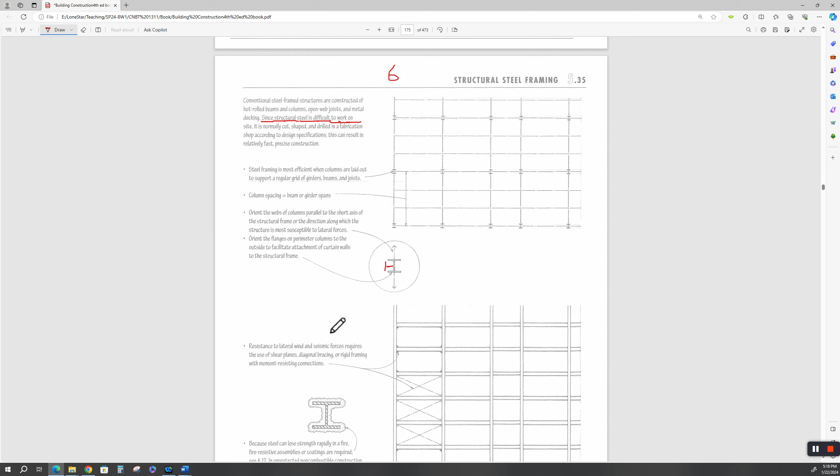Resistance to lateral forces -- we talked about this before. Making a rigid structure, well, they're welded joints. Is it rigid? Are we going to cross brace it? If you cross brace it, you can't really put a window in there now, can you? How are you going to skin this? Where are your shear walls going to be?

The structural engineer has to go through and do a moment distribution. When a wind or earthquake is pushing on this building and wants to make it fall down, where are all these moments going to go through these columns and how are they transmitted all the way down to the foundation? That's the structural engineer's job.

The big thing you got to worry about is if I want to expose this steel because I want it to look pretty, like in the Centre de Pompidou in Paris, France, how are we going to fireproof this? Because fire code says you need to fireproof your building, and that's a good thing, because steel will lose its temper after a certain temperature. Some say 800 degrees it begins, some say 1,000, some say 1,200.

If you go back and look at the videos of 9/11, those planes crashed into the upper section of both World Trade Centers. They disintegrated in there and started a huge fuel fire, that jet engine fuel. It heated that structural steel up so hot, above it and below it, into the heat affected zone, that the steel just couldn't take anymore, and those bundled tubes let go, and the building collapsed all the way down through the center line.

Now, this is a curtain wall. We haven't talked about curtain walls yet. You've got to put some kind of skin on it to keep the wind, temperature, and rain off of it. So most of these buildings have some kind of curtain wall. Some have windows in them, some don't. How do you frame that curtain wall? How does it tie into the diaphragm floors? How does it tie into the structural steel? That's what all this is about.

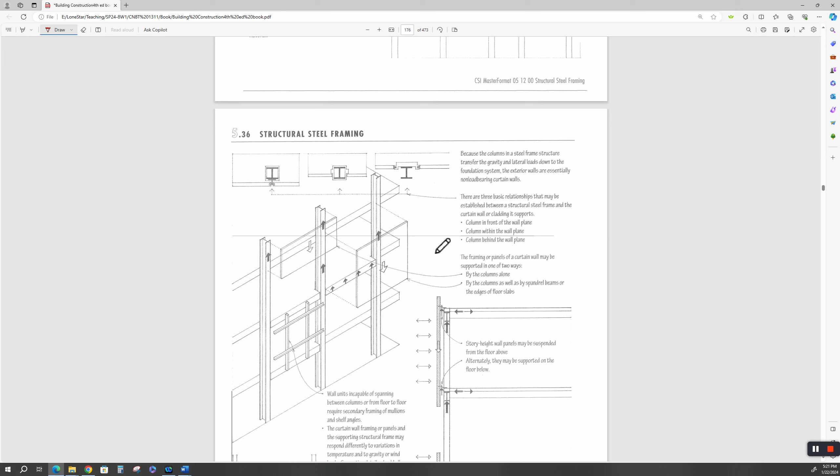There are three basic relationships that may be established between a structural steel frame and the curtain wall or cladding it supports: column in front, column within the wall plane, and column behind the wall plane. Here's a column in front.

Column behind the wall plane. We have an offset, and you've got clips that hold this. You got it in front, within, and then behind.

But they all have to be fireproofed. Some of the fireproofing can be sprayed on. Sometimes they box these columns in multiple layers of sheetrock to get you your 1, 2, or 3 hour fire rating.

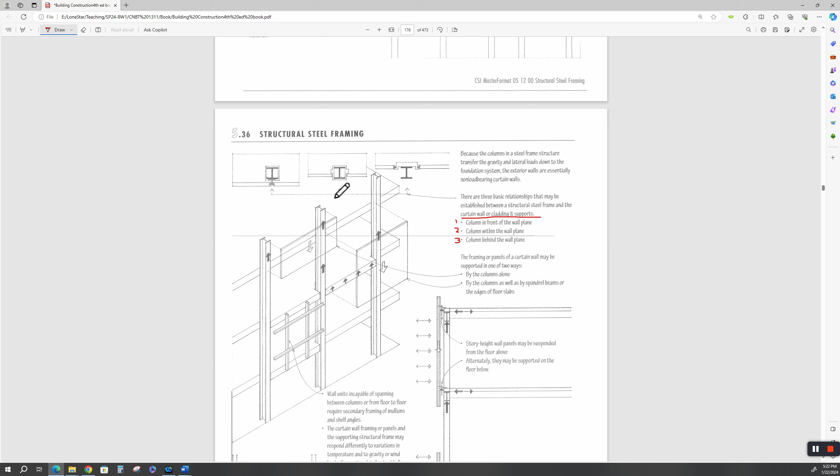Wall units incapable of spanning between columns floor to floor require secondary framing or mullions and shelf angles. So sometimes you have to have mullions or secondary framing to hold your curtain wall. That all has to be architecturally designed. Again, you get with your curtain wall people.

The curtain wall framing or panels and the supporting structure frame may respond differently to variations in temperature, and that's a very true statement. If this is a lot of glass, it's going to have a different thermal expansion rate than the concrete and steel will. That has to be taken into account.

Sometimes you've got to float that curtain wall, let it move on the outside of the skin. That skin's going to move back and forth. The wall may be subject to both wind pressure and suction - we've talked about that before, how on one side it's positive pressure and on the other side it's negative pressure.

You may have to have spandrel units. Jack bracing is like a knee brace. They all go by different names by different people who make this stuff.

If diagonals are used to brace a structural frame, they will affect the design of the wall units. You might want to show your diagonal bracing, your X bracing, if this was glass, but you might not - this might be a solid wall panel. Then on the next bay that didn't have X bracing, you could put glass in there.

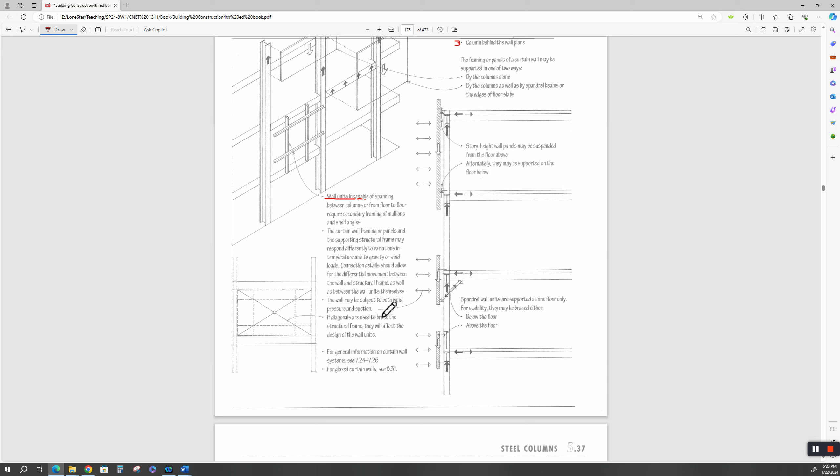This is not easy. This is not an easy profession. Construction's not easy, structural engineering's not easy, architectural design's not easy. It's fun, it's challenging, and it's rewarding, but it takes creativity.

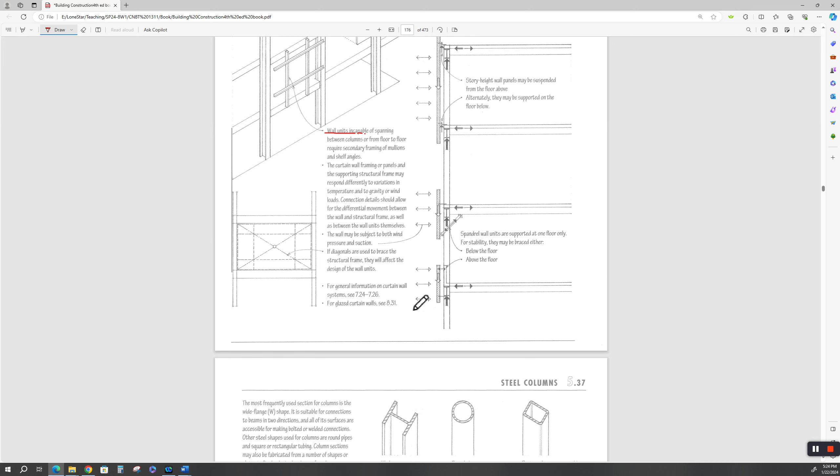In Chapter 7 they talk more about curtain walls. This is just a sprinkling. You could specialize in curtain wall systems, just like you could in structural steel or concrete or masonry. For glazed curtain walls, see 8.31 - that's where the individual panels are glazed or inset in a steel frame.

Most shapes, we've talked about these before. We had a larger collection of structural steel shapes in the floor section. Anyway, it's a W shape, round pipe, rectangular, square tubing, welded plates for girders. We talked about girders in the Hardy Toll Road. Welded plates are box girders.

I've never seen a cruciform or four angles welded together like that. I have never, ever in my life seen anybody use something like that.

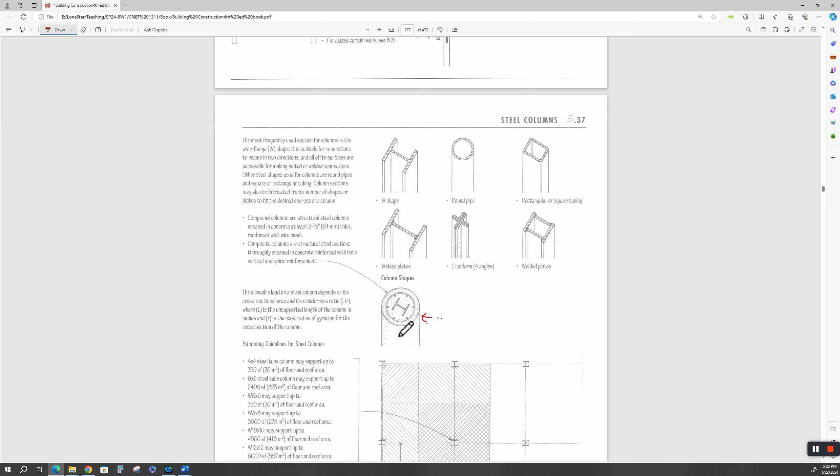Now, I have used this quite a bit, where we would use a structural steel hot rolled member inside a large round formed concrete column, and you'd have your normal concrete reinforcing steel to support the concrete, and this would be one big super duper super strong concrete column. It's a composite column because we're using structural steel and regular concrete reinforcing, so they call that a composite column.

Compound columns are structural steel columns encased in concrete, at least 2.5 inches thick. Why they make the distinction between compound and composite, they're the same - it's all the same. Sometimes you'll take a round pipe, if it's big enough steel pipe, and you'll put reinforced concrete in here. So you're doing a composite column backwards.

The allowable load on a steel column depends on its cross-sectional area and its slenderness ratio. That means its length to its radius of gyration, where L is the unsupported length of the column in inches, and R is the least radius of gyration for the cross-section of the column.

We talked about this before. You've got this long spindly column, but if I come in here and rigidly attach something in the middle of that column, then this column's not going to be this long. It's going to think it's this length, and there's going to be another column that thinks it's that length, not the full length. That's a layman's Reader's Digest version of KL over R. K is a stiffness, length, and then radius of gyration.

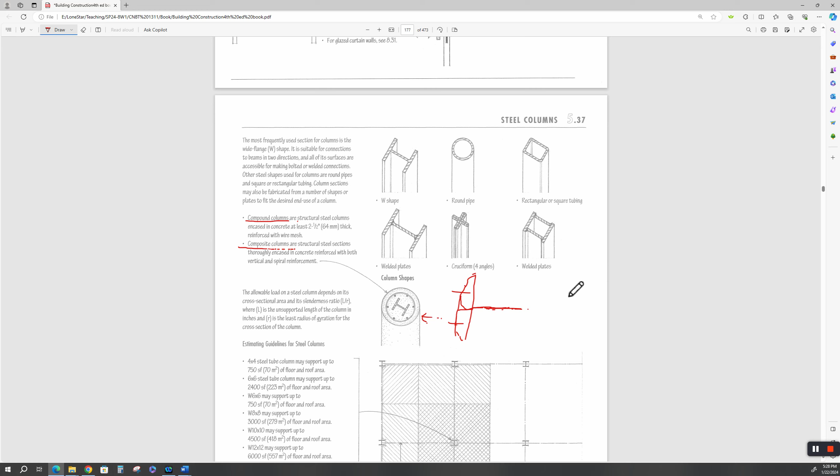I welded up some big plate girders. I don't remember if I told y'all that in a previous video or not, for the Hardy Toll Road, going over the railroad yard. Those beams are bent up and look like some crazy person did them. The reason we did them like that is because the railroad would not give us clearance to sink a column. So I had to go way outside the normal specs and design a big welded box girder. Those things had real super thick flanges, 8 feet deep. Anyway, I think I've already stated that.

Estimating guidelines for steel columns. Oh my God, this is going to get you in trouble.

These are rules of thumb you will get with your structural engineer. You will consult with your structural engineer for final design, somebody that actually knows what they're doing, and they need to be a PE, a professional engineer, registered in the state you're doing your business in. You're going to want company in court if this thing falls down and goes boom.

But this gives you some rules of thumb for your general layout. A 4x4 steel tube column may support up to 750 square feet. This is okay, but again, it depends on your floor load.

It depends on everything, okay? But a 6x6 steel tube column may, and I love this, see, may support. Doesn't say it will, it says it may. This says may support. There's no guarantee. It says it may support.

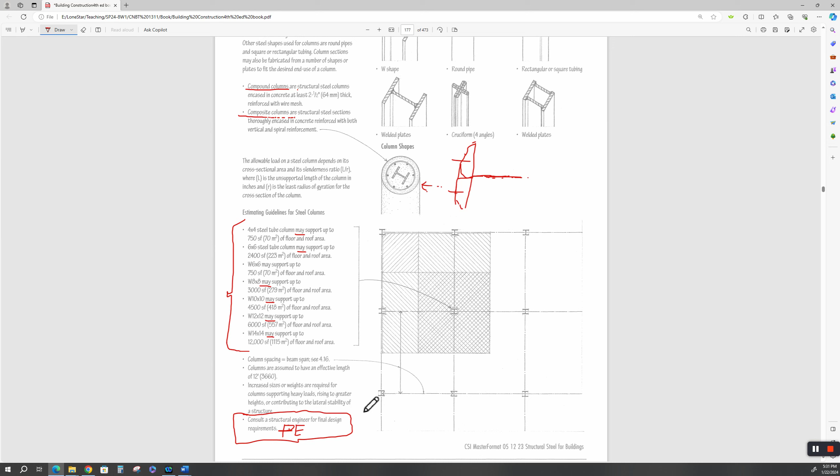Increased sizes or weights are required for columns supporting heavy loads. Well, no kidding, the heavier the load, the stronger the column has to be. And then you got to worry about your lateral stability, and we've talked about all of that. We just did that up here in this KL over R thing.

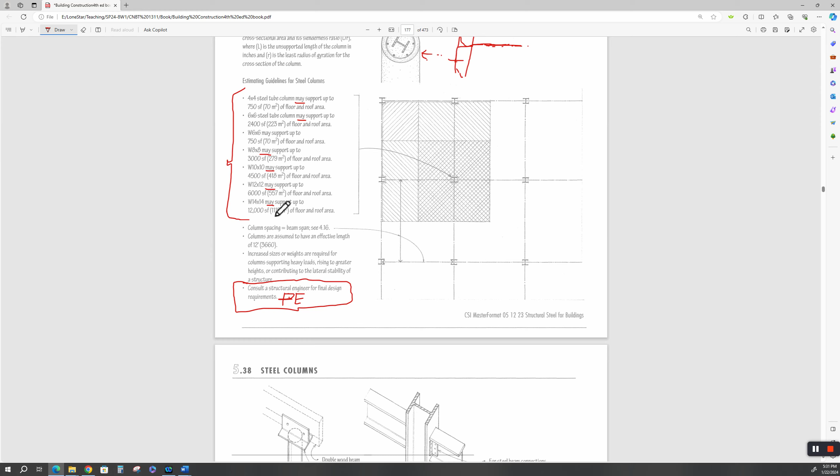Again, what are you going to do as the architectural designer? You're going to consult with your structural engineer. You can use this to start with on your butter paper in your dreamscape, but don't be surprised if your mileage varies. Remember the term may as opposed to shall.

All right, steel columns. All right, this is important. You will take a steel detailing class. Double wood beam or a steel connector welded to a column.

You're going to have a steel connector welded to a pipe or a column, and then you can slide your beam over your wood beam, and there'll be holes prefabricated in here by your fabricator for your wood joist. Steel beam connections, AISC, we talked about those before.

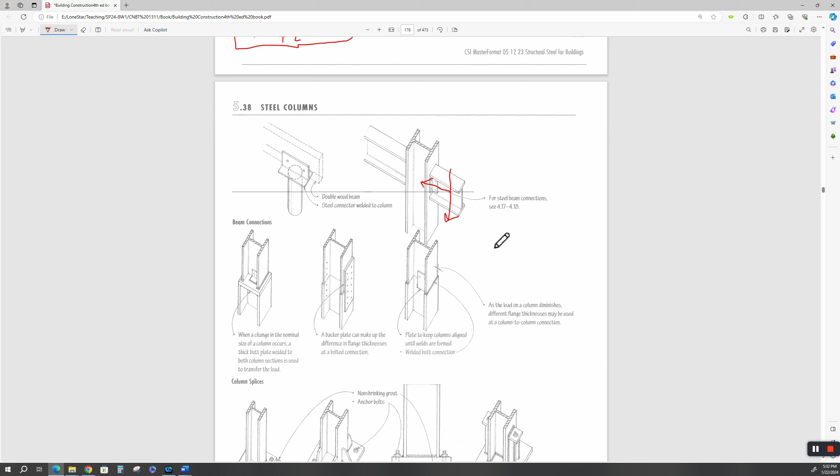This is considered a pin connection. It will not transmit moment. It will resist lateral movement this way, and it will resist shear movement, downward loading that way. Okay, go back to chapter 4 for steel beam and column connections. I already talked about that.

Column splices. Okay, now why would we even talk about column splices? Because the higher up the building goes, the less weight the upper columns take, right?

Are you going to take a huge beam on the bottom and run it all the way to the top? If it's a mid-rise building, it'd be more economical to use the same size column all the way up—that makes your building stiffer. But if it's a high-rise building, you'll step these columns because the upper floors carry less load than the heavy columns down lower. So you'd have to splice them.

So this is a way to splice them. When a change in the nominal size of a column occurs, a thick butt plate welded to both column sections is used to transfer the load. So you have this butt plate.

Welded to this heavy column, then you set the lighter column on top of it with an alignment clip, and that clip is welded. The bolting is to align this, so you can shim it and plumb it. Then your structural welder will weld all the way around this thing, all the way around the side. I'm surprised they didn't weld that—maybe they don't need to.

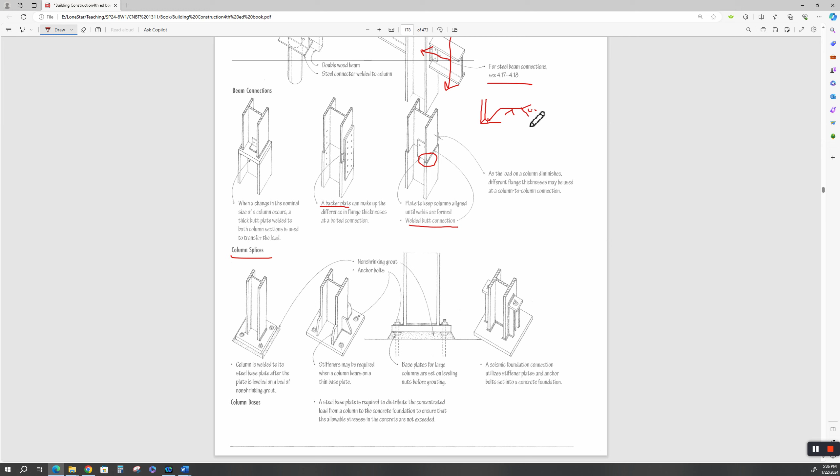Your designation will be your rod, like an E6011 or E7018—that'll be part of your welding deal. If you want it welded all the way around, you put that symbol on there.

As the load on a column diminishes, different flange thicknesses may be used—we already talked about that. This is an alignment plate, here's your bolts, so this is an erection plate. It comes from the fabricator already welded on this deal. You line this up, plumb it, shim it, and once you get a go on it being aligned, then you can come in here and weld this.

It depends on how heavy that steel is—you may have to preheat it, or anneal it. You may have to put heaters on it, wrap it, and heat treat that weld after it's welded up, depending on how much weld you had to do.

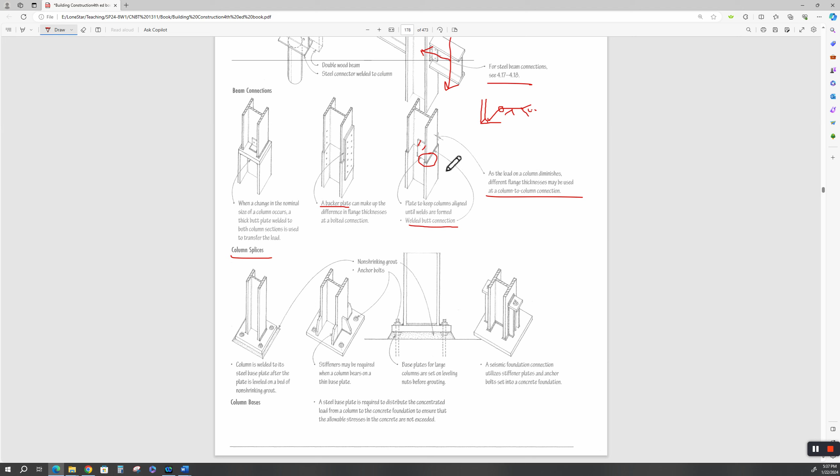Pressure vessels out in large refineries have to do that—put a tent around that big pressure vessel, and wrap that weld joint all the way around it with induction heaters, to heat that metal up, anneal it, and let it come back down to ambient temperature. It's all part of the welding specification you have to follow.

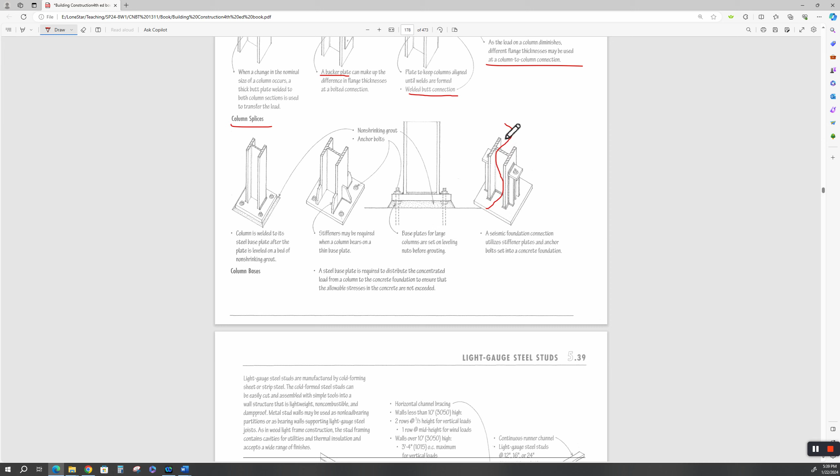A seismic foundation connection—this is a typical seismic foundation. It stiffens that up, and remember the seismic stuff we talked about? It allows that frequency, because this is going to do something like the snake dance, remember? And it stiffens that column up.

Now we're on light gauge steel studs. This is no different than the light gauge steel studs that we talked about in the flooring systems.

I told you about that company—I think they're a New Zealand company. They have a CAD system tied to an extruder, and they prefab these things. They prefab the whole bloody walls and truck them out.

I've got a friend of mine in Montgomery County I told you about—there's not a wood stud in his house, not a wood rafter. It's all steel framing, all light gauge steel framing. And the gauges range from light gauge to more heavy gauge. So this doesn't have to be the super light stuff you see on interior walls in a commercial building. These things can be load bearing, depending on the gauge they're cold-formed out of.

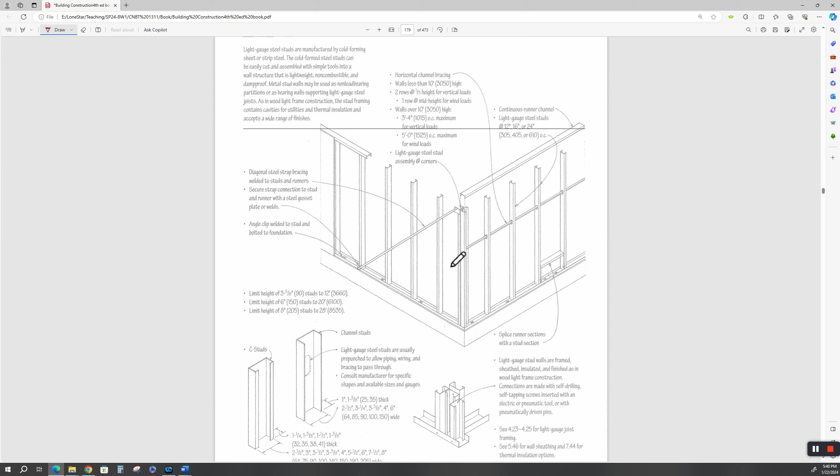We talked about that in that section of the book. And then these things are sheathed just like wood framing.

You've got horizontal channel bracing, you've got diagonal bracing. These things can be welded—you can bring a light MIG welder out on the job site and flux core it.

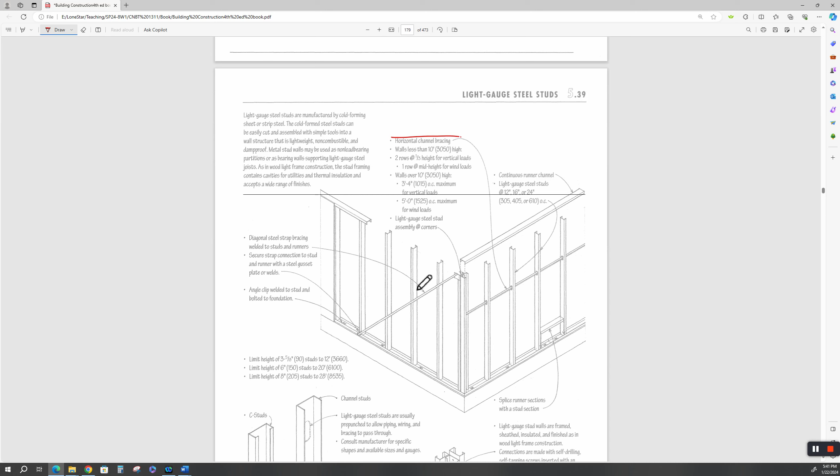You've got channel studs, you've got C studs. These channel studs are lighter—the light gauge ones are used for interior walls in commercial buildings. The C studs will carry a little more weight. They're stronger; they've got a larger sectional density, sectional modulus.

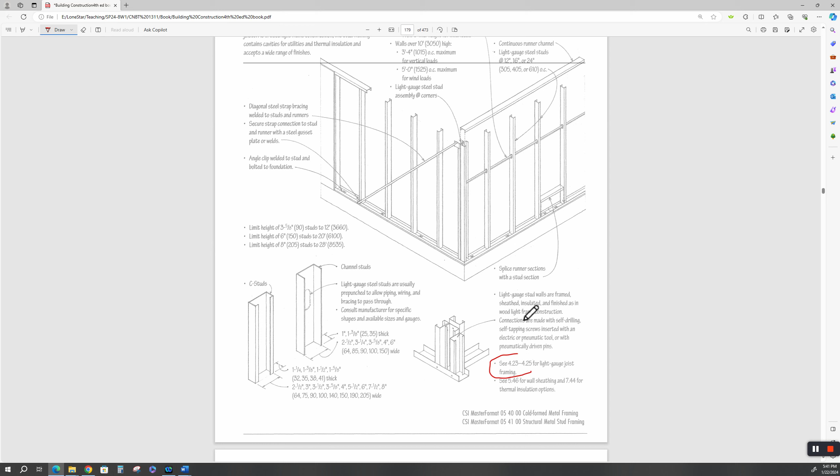You fix this just like you do with framing. We've seen these details in chapter 4. They've got web stiffeners on the end. We've seen this floor detail, and then bringing up a secondary wall. Sometimes you can get by with balloon framing, where if it's a second-story building, this whole exterior wall will be one height.

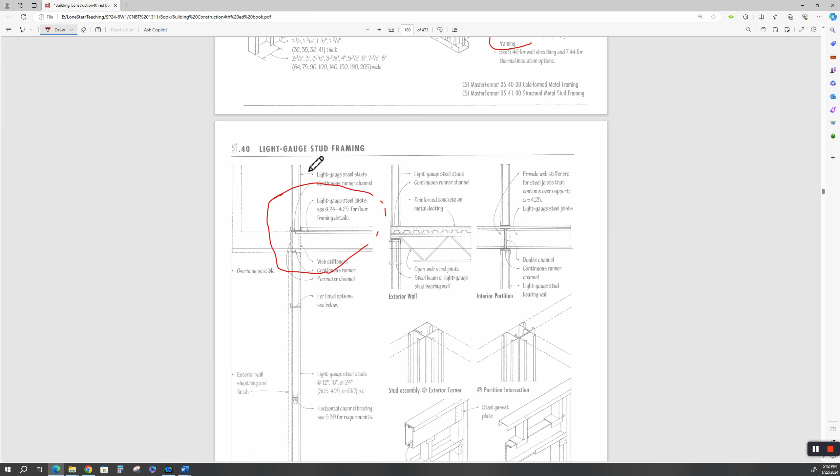This is how you do your interior cripple corners for bringing in your framing. Your manufacturer should have recommendations in their manual. U.S. Steel was a big manufacturer of these cold-formed steel studs back in my day.

Like I said, with some companies this stuff's formed on site. The steel comes out in rolls—4-inch, 6-inch, 8-inch, and 12-inch—and they just put a different die in the extruder. If you need a 12-inch deep C-section that's 20 feet long, they can make it. You don't have to splice it, you don't have to do nothing. That company builds whole walls in the factory, then trucks them and erects all of it, so you're not erecting individual sticks on site.

It's easy to do truss bracing, and with modern spray foam insulation, once you get the exterior sheathing and vapor barrier on there, you can come inside and spray expansive foam in these cavities after all the electrical and plumbing's run, if it's dried in. There's really nothing else to say—the sheathing is whatever wall treatment you want, how much insulation, and the wall sheathing.

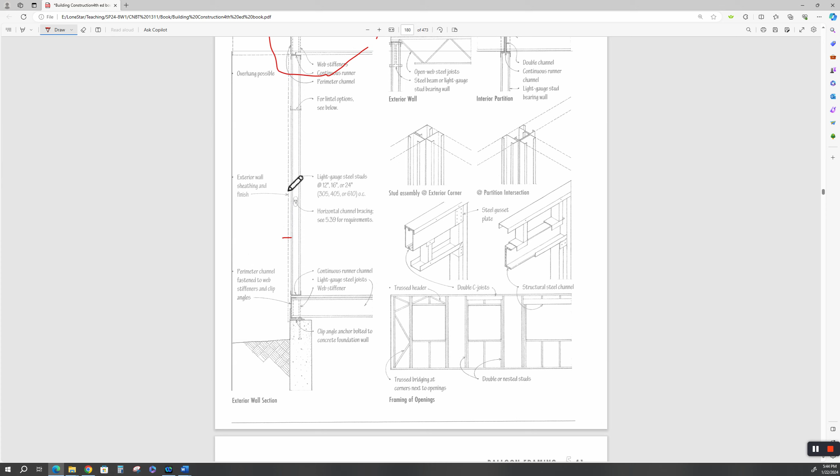If you want an air gap on the outside, you come in and put vertical stringers, then offset your sheathing against your insulation so you have external airflow in super hot climates out through the top. That's another way of doing it. That architect in Austin does a lot of weird stuff like that, where it's like a skin over a skin. Your imagination is your guide.

It talks about balloon framing, which we talked about before. With light gauge steel studs, this is easy to do—you just extrude out the length. I would look at holding this to 2 stories; 3 stories might be a stretch, but for a 2-story residence it should be easily done, especially if you incorporate diaphragm flooring in here. It should not be a problem.

2x4 studs spaced at 16 or 24 inches. I would keep them at 16 inches just because it'll keep the drumming effect out of the walls. Your building codes are going to have something to say about that anyway.

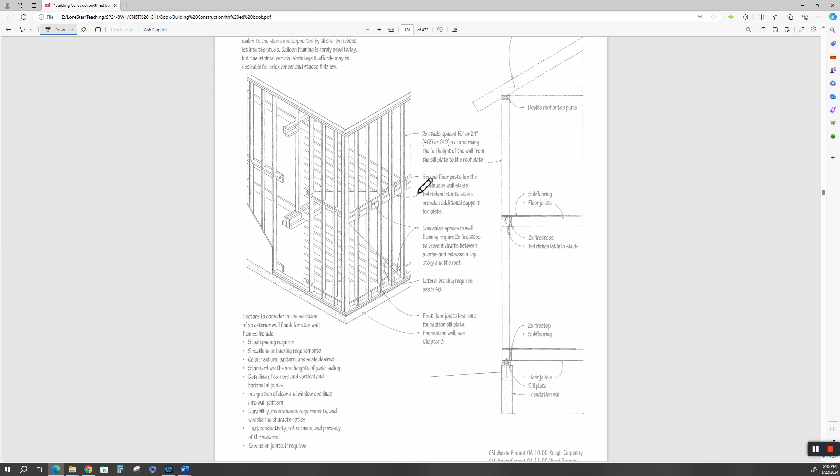Factors to consider in the selection of an exterior wall finish for stud wall frames include your stud spacing, sheathing or backing requirements, color, texture, and scale desired. These are factors you need to take care of as a designer. Expansion joints if required, heat conductivity, durability, maintenance, integration for door and window openings, detailing of corners, standard widths, etc.

We've seen these details before. We talked about fire stops and fire blocking. You may need fire blocking in here too. Again, your fire code and local building code are going to tell you what you have to go by.

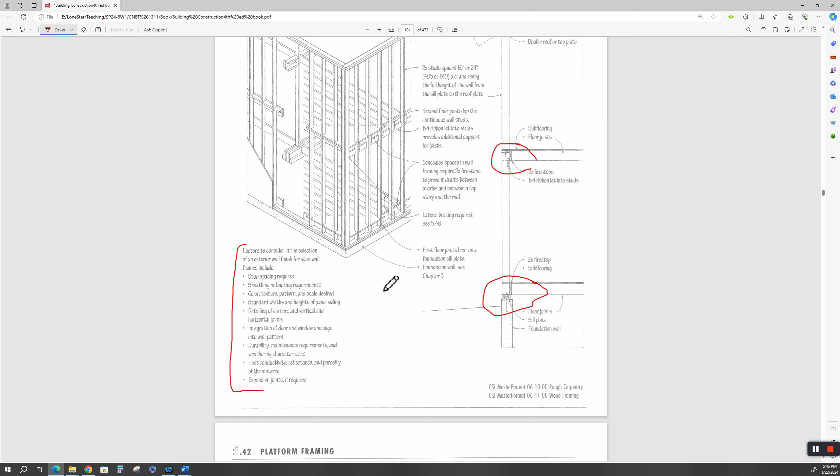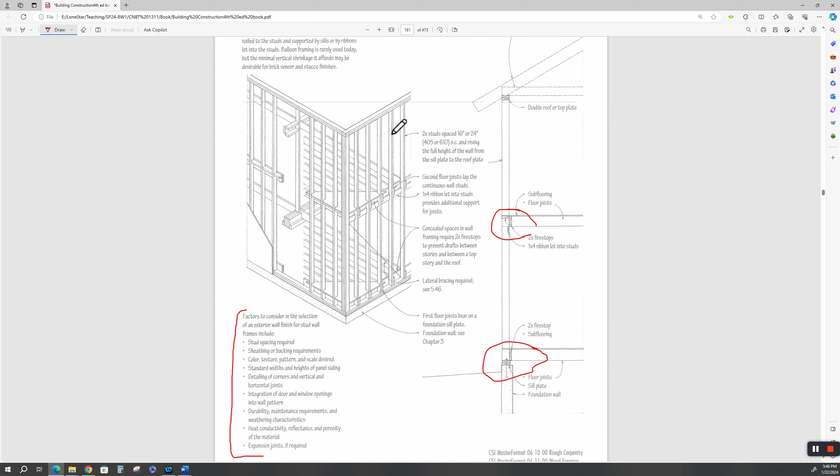Platform framing is a light wood frame having studs only one story high. This was balloon framing, right? We're done with the steel, so it doesn't matter if it's 2x4s or light gauge steel. Balloon framing, you're bringing a whole wall frame up. Platform framing is just that - you got one story, and then you set the second story on top and go on up.

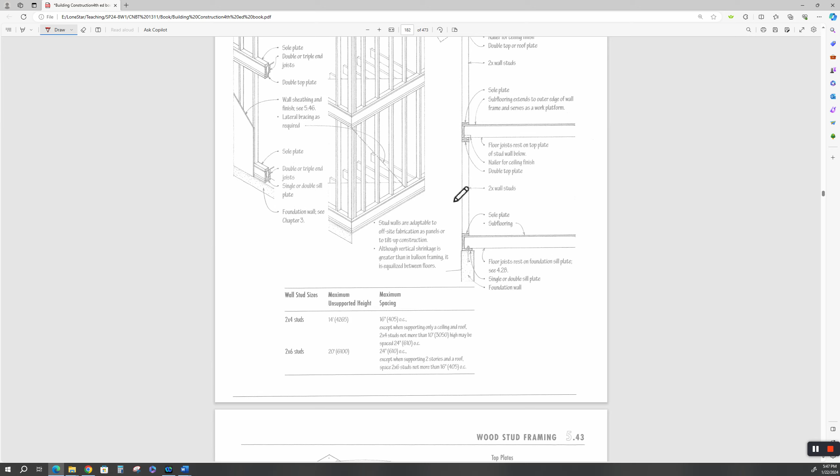And there's that crazy roof detail again. At least they stopped the roof joist here. You got your double sills up here, your double plates. Your sills are down here - sole plate, sill plate, whatever.

We've seen these details before already in the other chapter. Again, be careful with these rules of thumb on these spans.

Maximum unsupported height is 14 feet for a 2x4 stud. I would not go that - I would not go 14 feet with an unsupported 2x4 stud. Don't do it. I wouldn't go 20 feet with a 2x6 with the kind of wood we get these days. I would not do it.

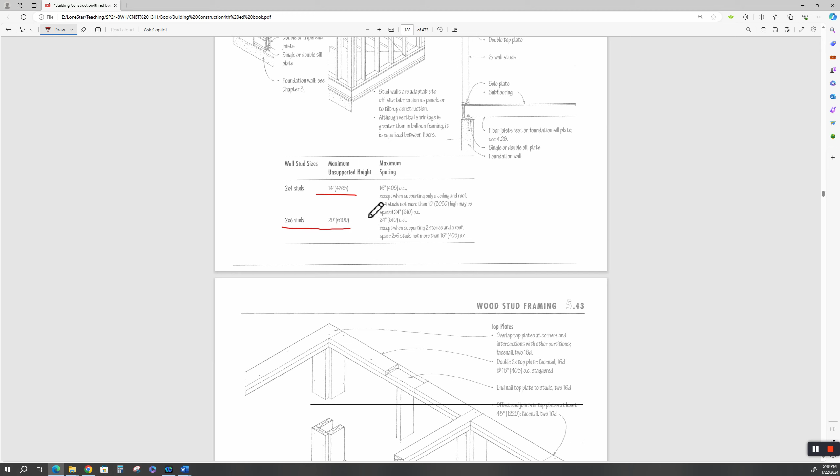Because most story heights are 8 feet, so just stay with the standard 4 by 8 foot sheet, and you got your joist, and you move up with another, and you go joist. Your joist is going to be - this is 8 feet. You got your ledger beam up here, it's got your cap beam, and you're going to set the next deal up here another 8 feet. Stay within a standard module.

That gives it whether you're using 2x4s or 2x6s. And if you can afford 2x6s, use those because it gives you much more insulation. A 2x6 is 5.5 inches deep, a 2x4 is 3.5 inches deep. So it gives you another 2 inches of insulation, and it's stronger.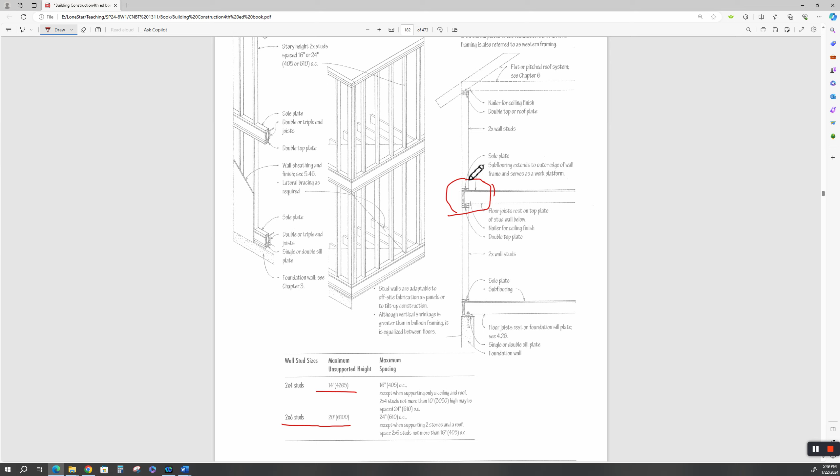Now, an argument can be made that you'd use a 2x6 down here and then a 2x4 up there. Fine, if you can get away with that, then do that. Me, I'd standardize and be done with it. Wood stud framing - we talked about this before, maybe not, maybe this is deja vu.

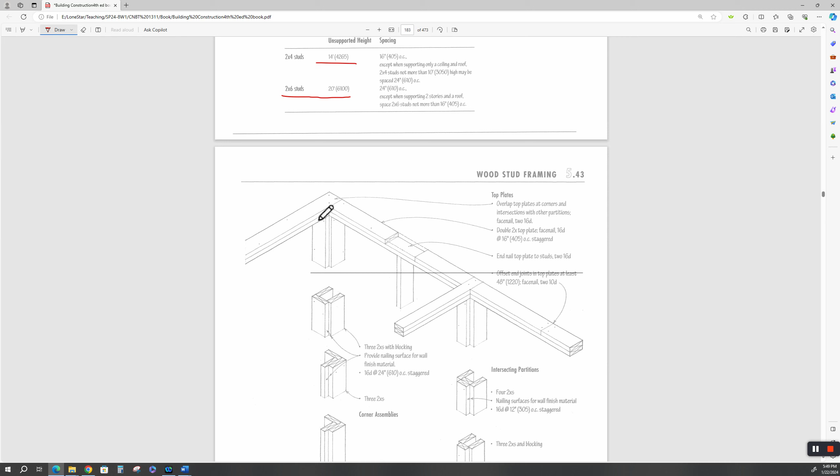Your top plates are staggered. In other words, if this top plate is going all the way to the edge of the wall, this top plate stops right here. This bottom of the top plate stops right there, and this top plate goes all the way through to this edge of the wall. And since this one goes there, and this one goes all the way across to the outside edge, this one stops here.

This might be a cutout for a joist or something, who knows. But as you come through with your top plates, the bottom of this plate is nailed into the end of this wall while it's laying on the ground, then you're going to tilt this wall up. So even in conventional wood framing, you're going to set these and frame them on the ground on the slab or the foundation.

Get as much of this done as possible. Then you're going to raise this, put jacks, knee jacks in it, keep it plumb, and then set these other top plates across, and it ties this in. Here's an intersecting wall - it does the same thing. This top plate goes all the way through.

This top plate goes all the way through. I see what he did - he just gave you a little cutout here so you can see that you're going to end nail that. So this plate down here would go all the way through as one contiguous piece. You'd stop this one, let this plate go all the way out to the edge of that wall, nail down through there, and this is an intersecting portion.

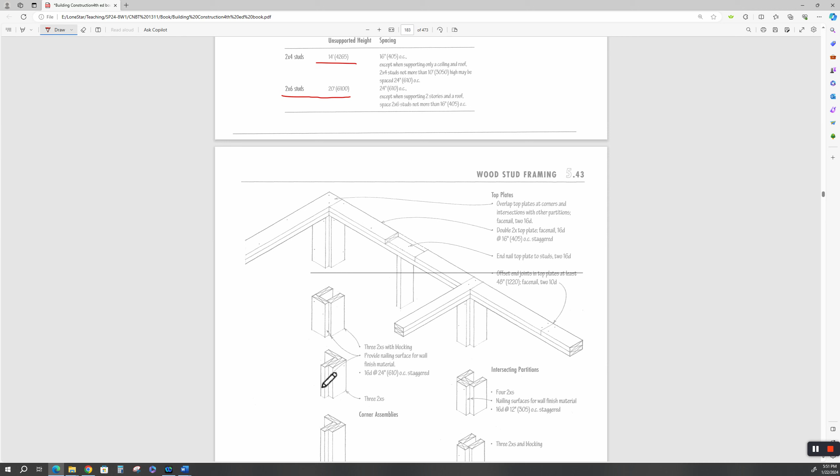It's generally 4 2x4s with nailing surfaces. Sometimes these are 2x6s. This is a 3 block, and it does several things. One, it gives you something to nail your wall covering to. This is flush on the outside, but on the inside you're going to be bringing sheetrock in, and that's going to hit in that panel. And that needs to be set up that way. If not, you're not going to have anything to nail that end of that sheetrock to, and your sheetrockers are going to be cussing you like nobody's business.

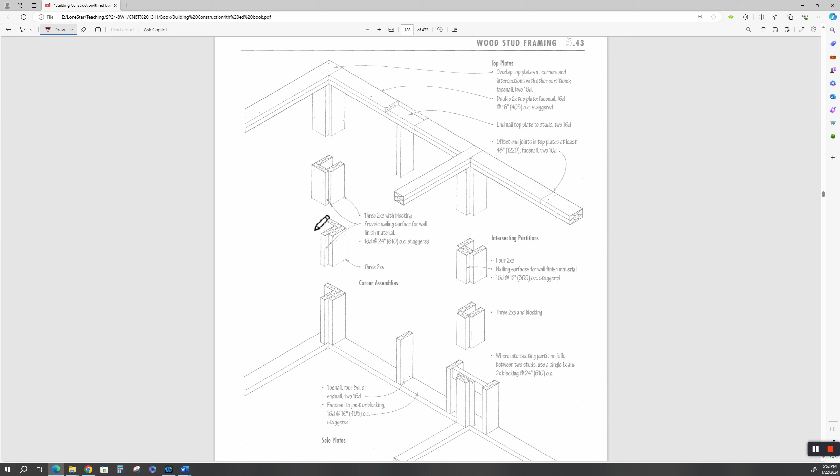I don't particularly like this style of corner assembly. I do like this - this is stronger, it's a box. But this works. The problem with this is you've got less surface area out here to nail to for your outside siding. Where here you have a full face and you've got more room for error. And this is really stronger than this. This is really cheap detailing here. So if you're going to do a corner assembly, you really want to do something like this. Maybe it's just that's the way I've always done it.

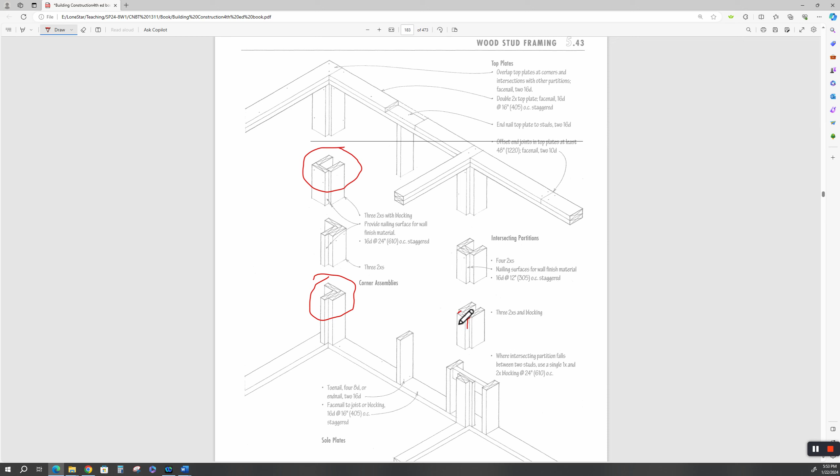We've really done this mostly all - we use, if this is 2x4s, we use 3 2x4s and then take the fourth one in there to capture for the inside wall, and that gives us a lot of nailing surface. This is an inside 3 2x. That gives you a place to nail that wall covering on the inside, and you've got that pocket to set that wall covering in right there, the sheetrock.

The reason we like to build these, including the sole plate on the deck, is we can end nail these things and we don't have to toe nail them. We can face nail them. In other words, this whole wall lays down flat, and then we can drive the nails through the end on the top and bottom, raise the wall up. Now you cannot avoid toe nailing everywhere, but toe nailing is not as strong as end nailing. And if you don't know what I'm talking about, an end nail is that - that's a 2x4 laying flat on a surface.

And this is the sole plate. This is that. End nailing means we come in from the end here with super long nails, like 16 pennies, and drive the nails that way. And then over here on the top - okay, this is going to be broke - here on the top we have the first top plate. Remember there's 2 top plates? We have the first top plate, and we end nail that. And then raise this wall up as a unit.

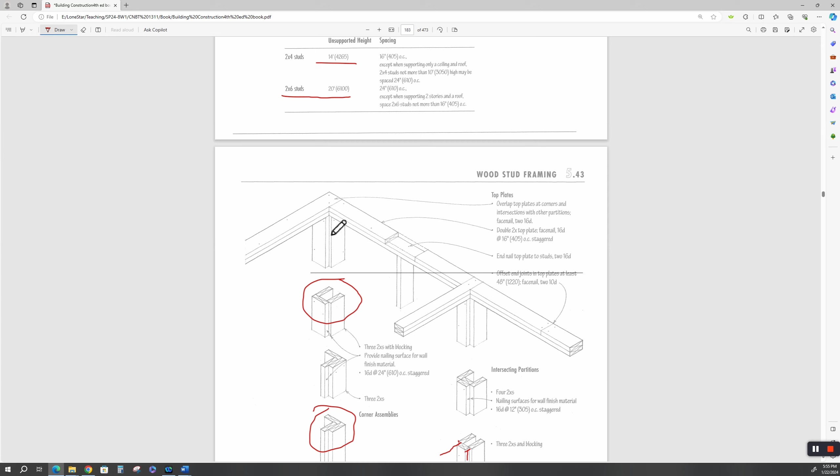And these top plates stagger just like they did up here. So this top plate, if this was the wall I just drew you, then this would be long, it would stick out. And we'd set it up there and line it up on a corner block and all that good junk, and keep going. And then come in here later and put our fire blocking in here, and usually you just use the scrap wood left over from cutoffs. This looks like a plumbing block through here where you're bringing pipes up from your slab for a bathroom or something - who knows?

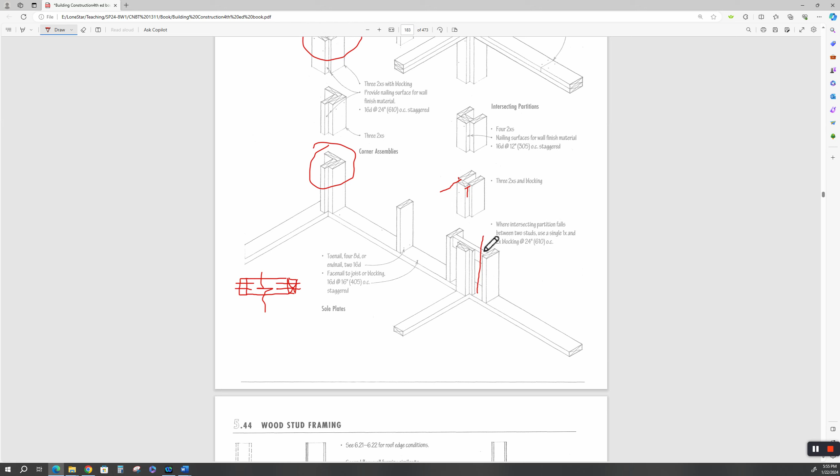Wood stud framing more. Where are we at on time? We're at 40 minutes. We're probably going to have to do another one. I hope not. Wood stud framing.

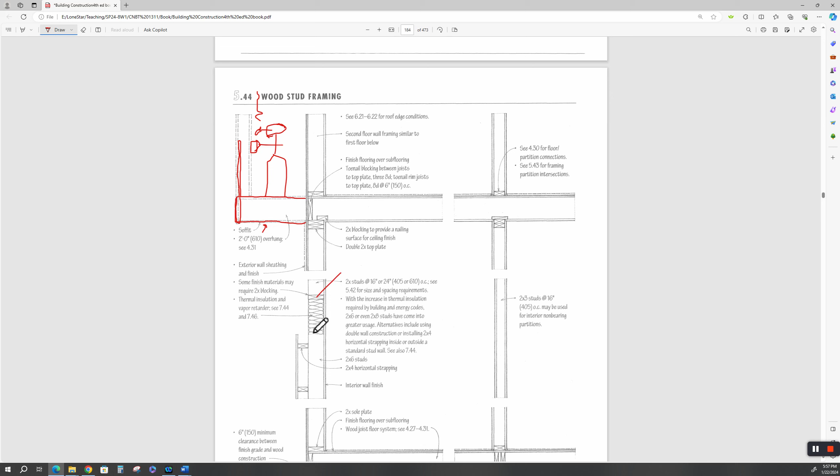Here we have our fire blocking, and here we have our insulation. This is the architectural graphics for batt insulation. Now, I don't really care for batt insulation. It's been around for a gazillion years, but the problem is after a while it starts to sag and sink. We've got good technology spray foam insulation now that is a whole lot better than batt insulation.

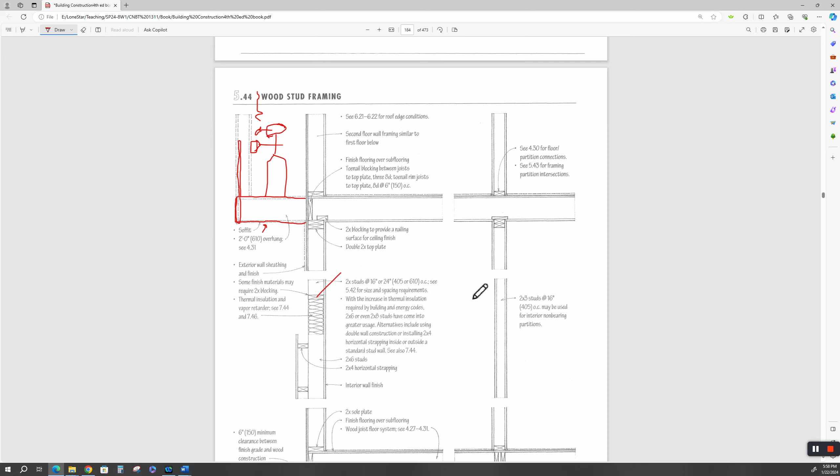Let's see. Interior wall section, a 2x3 stud, 16-inch centers. All right, whatever. If this is wood framing, that'd be 2x4.

Which is 1.5 inches by 3.5 inches. Okay, exterior walls, if you can get by, 2x6 is great. It truly is.

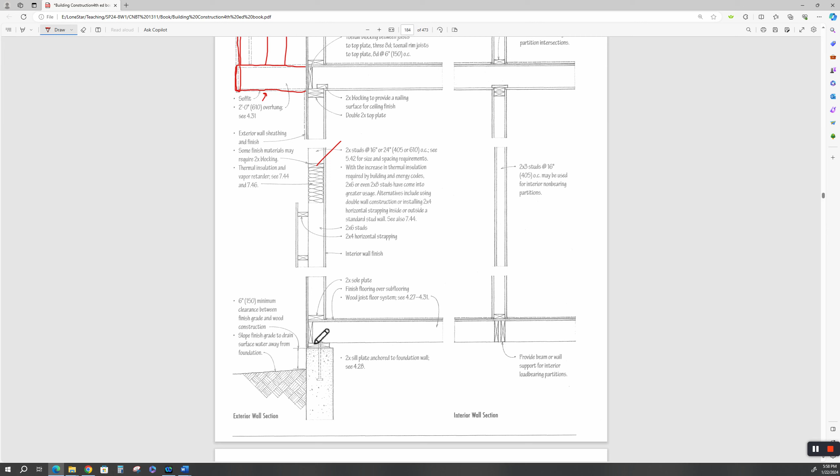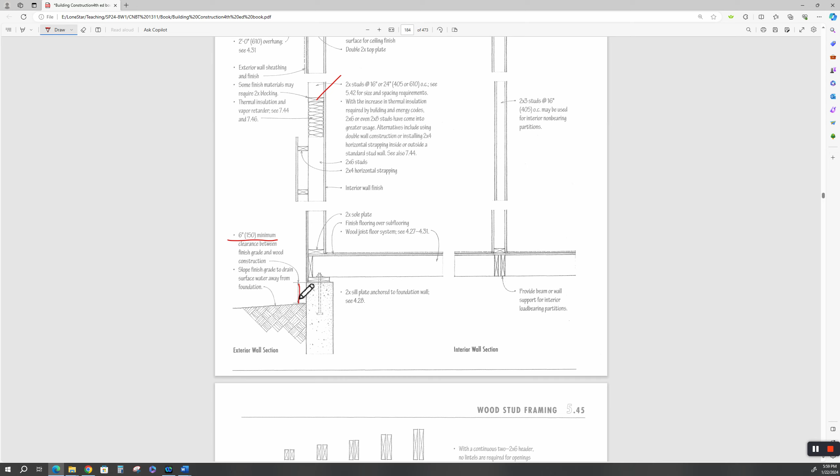Here shows the exterior skin going down below your perimeter end cap for your joist, your floor joist system. And this shows 6 inches minimum clearance between finished grade and wood construction. I would say you need 6 inches from the finished grade to any construction, masonry, anything. But that's neither here nor there.

All right, headers supporting. These are headers. This is a header. This is a header. This is a header over a window. This is a header over a door. This is cripples, blocking.

This is your rough sill. This is your finish sill. These are trimmer studs on both sides. Some people will call these cripples, but they're really a trimmer stud. Your main stud runs unbroken all the way from the sill to the top plate, and then you come up and you put your roughs in here with a trimmer, and then finish this off. You put another trimmer in here, and if you ever work a framing crew, some places the building code's going to require you to strap them with hurricane straps or clips.

This is using 2 2x6 headers, and no lintels are required. Don't bank on that, depending on your floor load. If it's a single story, you might get away with it.

Header supporting - this is what they'll support for spans, 1 story and 2 stories. Your mileage is going to vary. You will check your building codes. For spans over 4 feet wide, header requires 2 inches minimum solid bearing at each end down to floor or bottom.

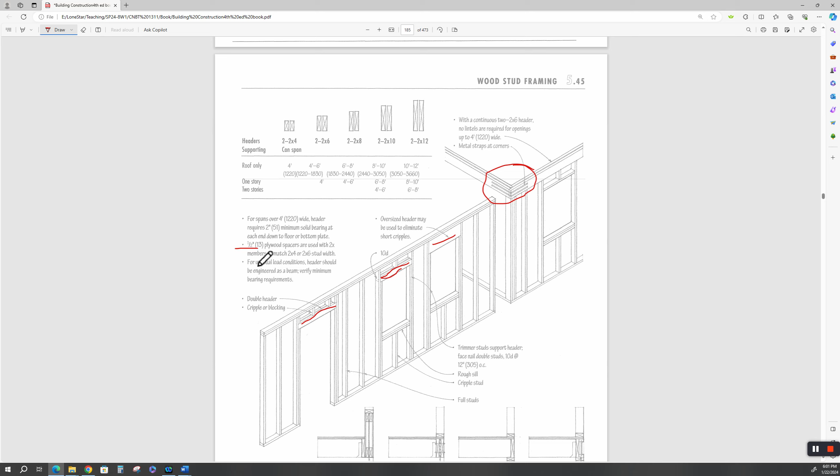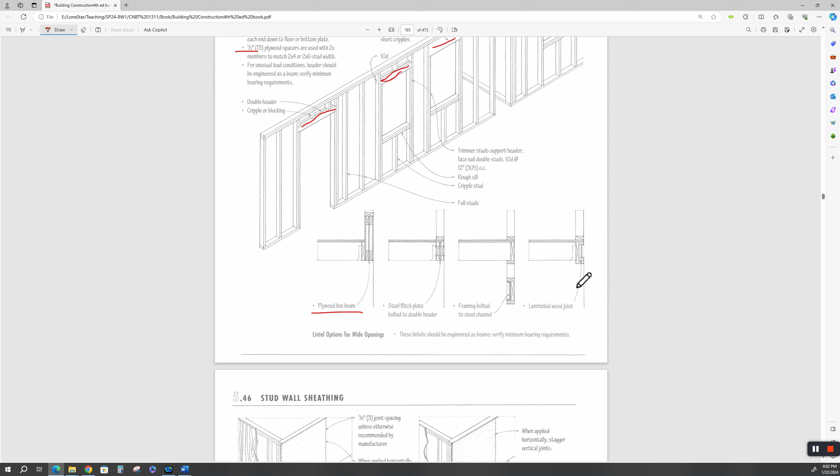All right, plywood box beam. We've talked about making composite beams before. Steel flitch plate bolted to a double header - that's another way of doing it. Framing bolted to steel channel and laminated wood joist, where you just buy a manufactured laminated wood joist and put that in there. There's all kinds of potentials.

Stud wall sheathing. No, we're going to finish this. I don't care. What do we got here? Gypsum sheathing - if this is exterior and you use gypsum sheathing on my house, I'm going to fire you.

Gypsum does not like water. Now, if you were in the desert, you might get by with that. But down here on the Gulf Coast, that is just ignorant. Ignorant as the day is long. Gypsum sheetrock, and it doesn't like water. I don't care if you're using waterboard or not.

Plywood is what you want for your external sheathing over your wood framing or your light gauge steel stud framing. Why? Because it works as a diaphragm. It's structural - it's got laminations going in 2 different directions. Do not use OSB, OSB is trash. That might be okay for a subfloor inside some trash house, but use plywood.

You will make a very strong structure that way. You want to stagger your horizontal and vertical joints as you're wrapping the house with your diaphragm. It's just good practice, the same as the masonry course. If you have a stack bond where the joints are all going in the same direction, there's no place for the joints to terminate if they get stressed. So if you can quilt these, checkerboard them so that the joints are not always aligned, that's a good thing.

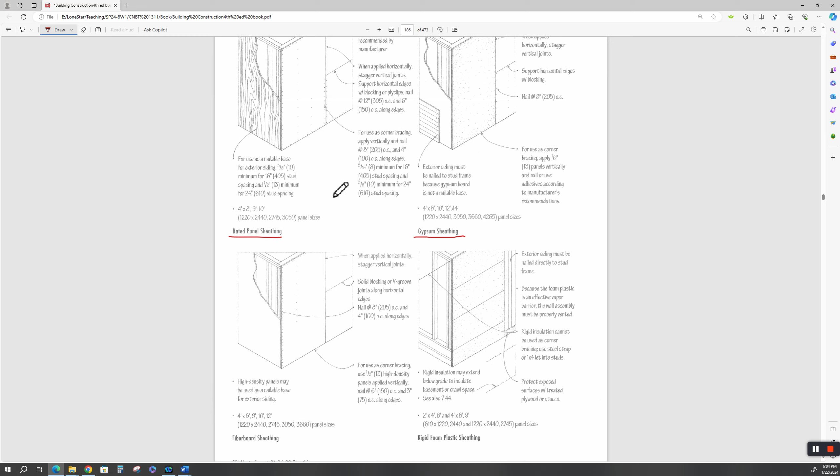All right, this is rated panel sheathing, and the American Plywood Association gives you a rate for those. We're not going to get deep down in the weeds with the engineering of this.

Fiberboard sheathing is almost as nasty as gypsum. A long time ago, they'd use sorghum fiber left over from agricultural stuff and impregnate it with asphalt. It was called Celotex, and I was told they're not allowed to make that stuff anymore because of the tar that goes into it.

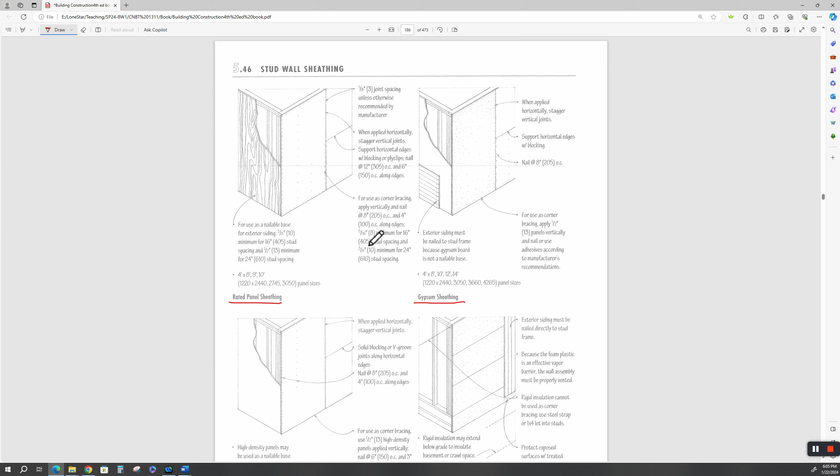But there are people that make all kinds of sheathing, and it's not structural—it's just insulation. So if you come up here and use structural plywood as a diaphragm, then wrap it with Tyvek, which is your vapor barrier, and then put your foam insulation board on it.

Okay, rigid foam plastic sheathing. They're going to tell you that's sheathing, but that's not sheathing, that's insulation. It's not structural.

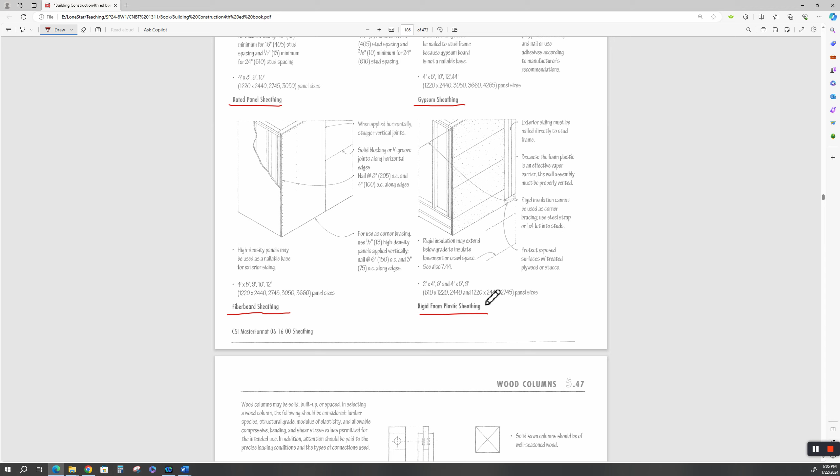So the best thing to do is to put this foam insulation on top of the plywood, then put your exterior siding, whatever it might be, like HardiePlank or Hardie sheets or whatever.

All right, wood columns. It's no different than any other—we've talked about built-up wood structures before, and the beams. So these are built-up wood columns. This is a solid sawn column. They're huge. We used a lot of those in that weird shopping center.

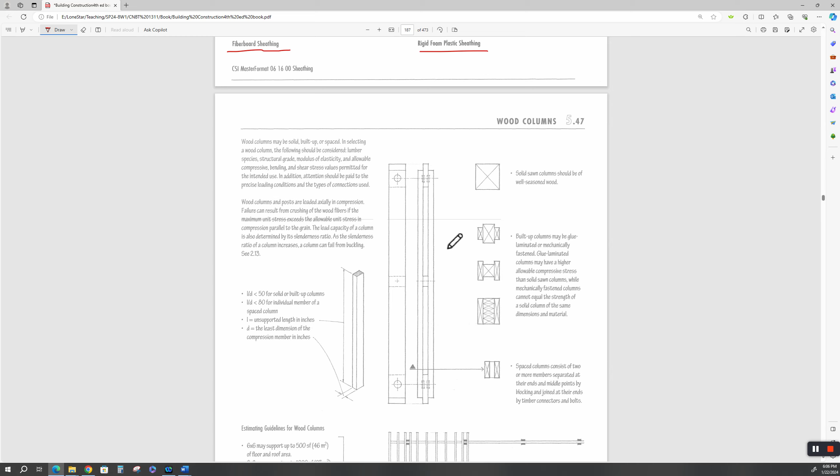This talks about different shapes, spaced in between. Your structural engineer, if you're going to get weird, will tell you. Some of those glue lam people will make glue-lammed columns and give you a load capacity for them. Here's some more rules of thumb.

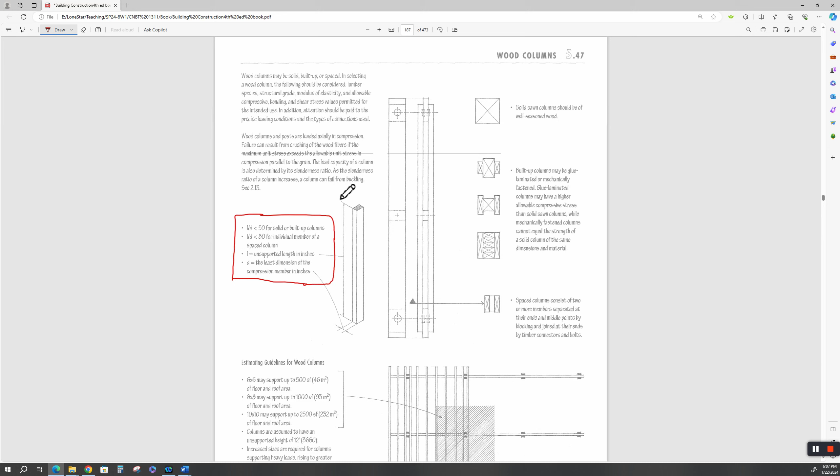Your mileage is going to vary. I wouldn't stake my inheritance on this. You need to do a full load analysis, and that's why you're hiring your structural engineer. Now, wood works good as long as you can keep it from getting eaten by insects and rot.

Okay, estimating guidelines for wood columns. Again, here's a bunch of rules of thumb. I'm not going to go through all these. It's your responsibility to read it.

A 6x6 may support up to 500 square feet. Again, your mileage may vary. And look at this—here's that word again, may. May, may, there's got to be another 'may' in here someplace. It may support, doesn't mean it will. So you need to consult your wood structural manual.

And again, for wood, it depends on the density of the wood. Where was that piece of wood cut out of the tree? What's the moisture content? How was it kiln dried? You're not going to get a mil spec on a piece of wood or timber that you're going to get on a hot rolled steel from a steel supplier.

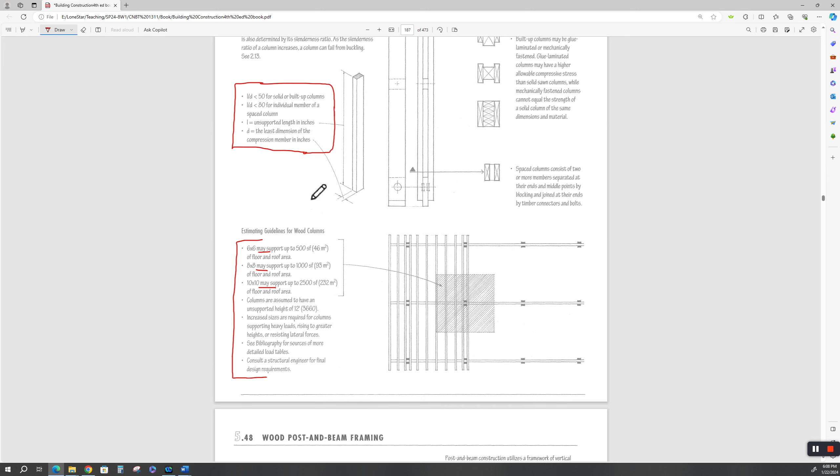When I order steel for the welding program, I get steel certs, I get a mill cert—the chemistry of all that steel that we bought. Not that we need it, we're not fabricating pressure vessels or anything, but they send it just because that's what you're supposed to do in the industry. Wood's not that way.

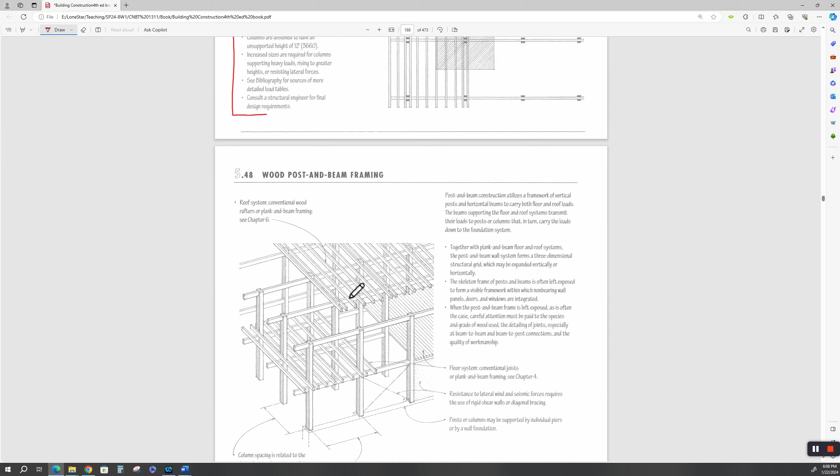All right, wood post and beam framing. This is the roof, and the floors are no different than the floor systems we talked about before in the other chapter.

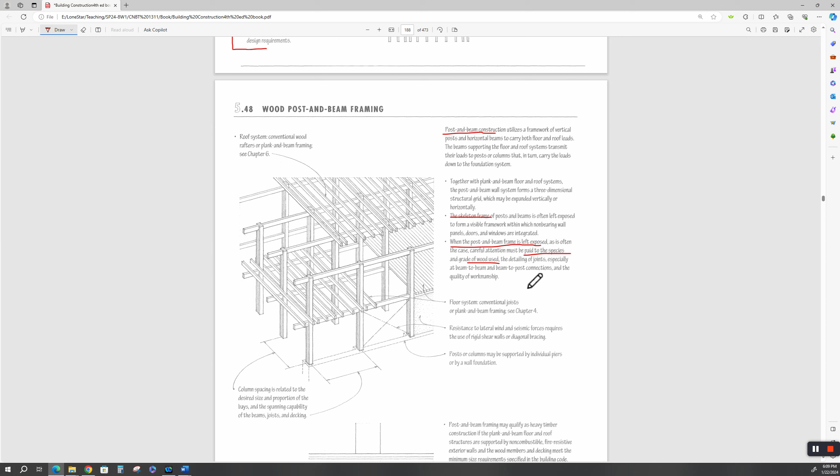When the post and beam frame is left exposed, you got to watch out what kind of species and grade of wood is used. You got to get it covered up pretty quick, dry it in, especially down here.

When are you going to use treated wood? When are you not? In my opinion, all the base plates need to be treated, all of them. If it's anywhere near exposed to the exterior, the idea is to use a treated base plate. The problem with treated wood is it's got high moisture in it, so you might need to let it dry out a little longer. But for a base plate, it's not that big of a problem.

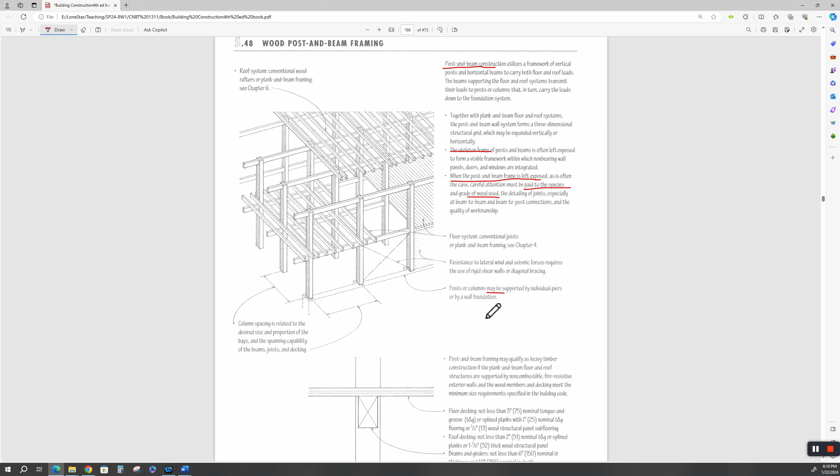Here's another word, may. Post columns may be supported by individual piers or by wall foundation. Well, no kidding—we went through all of this for foundations and the details and stuff like that.

Post and beam framing may qualify as heavy timber construction if the plank and beam floor and roof structures are supported by non-combustible, fire-resistive exterior walls, and the wood members and decking meet the minimum size requirements specified in the building code. This is a big if—may qualify. Now, this isn't a legal course, but that word 'may' carries a lot of weight, especially in court.

Here's some more rules of thumb. If it's not less than 3 inches nominal tongue and groove or spline planks with 1 inch nominal tongue and groove flooring, or half inch, etc. Roof decking, not less than 2 inches. Nobody uses wood roof decking anymore. You're talking about expensive.

I did some old warehouses down off Washington back when developers came in and turned them into nightclubs and bars, that kind of thing. Back then it was cheap to do that. Some nice wood construction.

Beams and girders not less than 6 inches nominal in thickness and 10 inches nominal depth—might be heavy timber framing. And columns not less than 8 by 8—might be heavy timber framing.

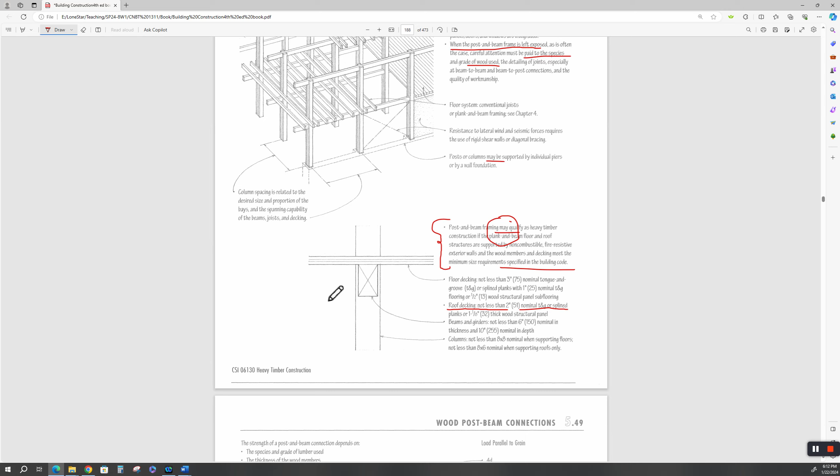What does heavy timber framing mean? That goes into another part of the building code in certain sections, and it also increases the cost of your framing. If you're doing light wood framing as opposed to heavy timber framing, you might need a different skill set, a different construction crew, and the general contractor is going to charge more for that.

Post and beam connections again—the strength of a post and beam connection depends on what? This is going to be important. Bottom line: the species and grade of lumber used, the thickness of the wood members, the angle of the resisting forces relative to the grain of the wood, and the size and number of bolts or timber connectors used. The strength of a post and beam connection depends on all of these things.

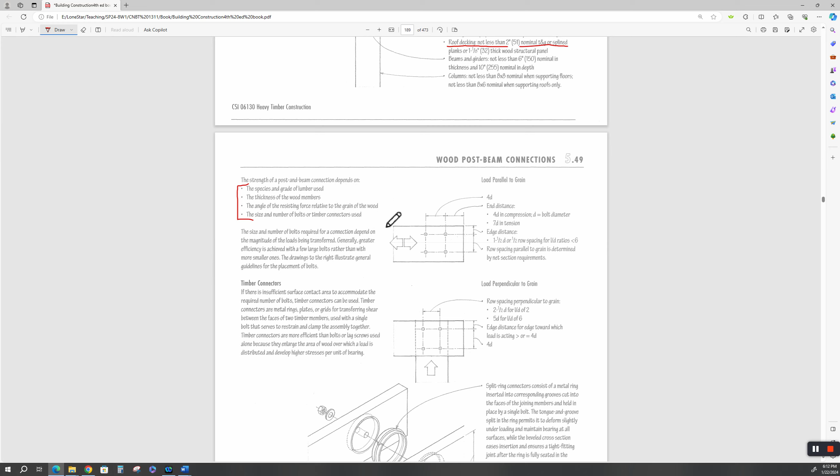All right, timber connectors. Let's look at these, and then we're going to call it a day. We're at 56—we'll survive this.

Whether it's load that's in line with the grain or load perpendicular to the grain has an effect. If the load's going down the grain—the grain's like little fiber straws going this way—and the load's going this way, it makes a difference in how much it'll carry. He gives you some rules of thumb here. Don't get too lost in the weeds on this—this is structural engineering stuff.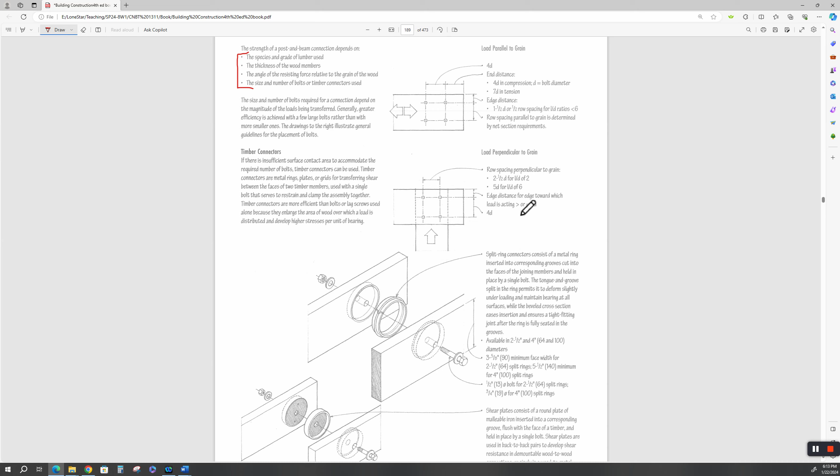This is an interesting connection, called a split ring connection. There are all kinds of commercially made wood connections to splice beams together. I talked before about how I did a splice of a beam—maybe they're talking about built-up columns here, it's the same stuff. You can't weld wood together; you can glue it, nail it, screw it, or use mechanical connectors, but those allow rotation.

There was a company that made a connector years ago called a Bulldog. It had teeth on both sides that clamped in and grabbed the wood fibers to keep it from rotating. Was it a rigid connection? Not really. If you want a rigid connection, you start laminating the beam up—put a sheet of plywood in there with some good epoxy-based glue, apply pressure, laminate it up, and then you can have more of a rigid connection.

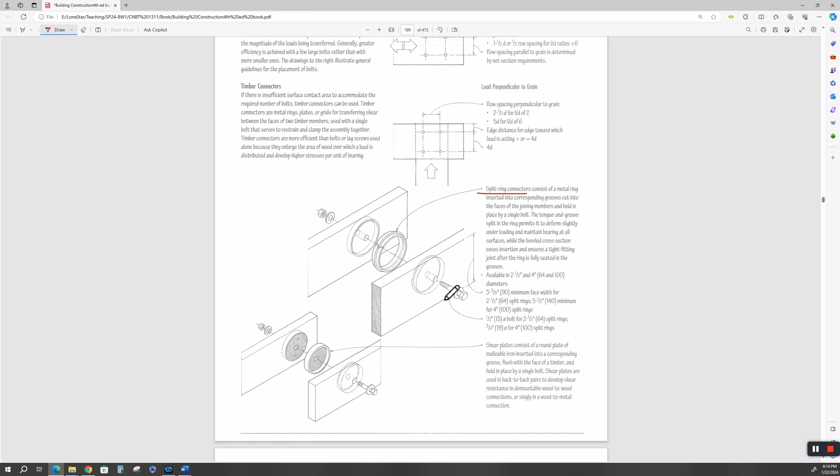So these will work in shear, but they won't work in bending. And this is... we're going the wrong direction.

Let's go one more down. This is talking about column base supports, column supports for beams, and column-beam connections. We talked about this before—this is, like I said, a repeat.

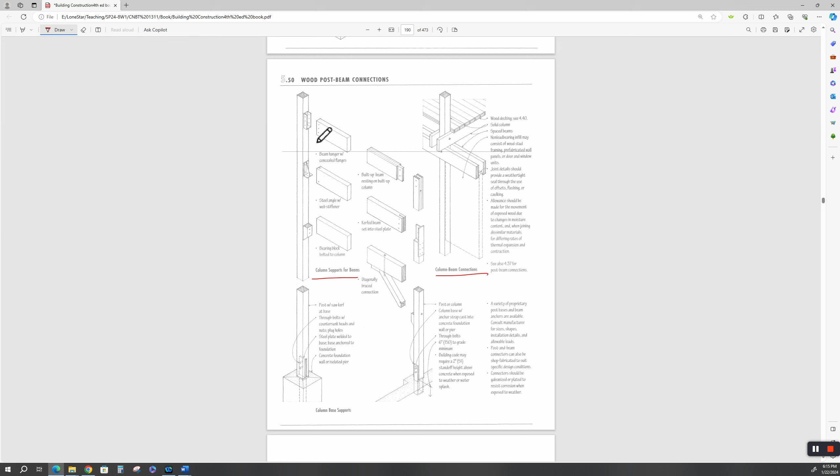This is a beam hanger with concealed flanges—now that's a joist hanger, is what we called it in the floor joist discussion. So what difference does it make whether it's a beam or floor joist? That hanger is nailed into the column, and then the wood beam comes in, whether it's a joist or a beam—it's the same deal, nailed in on the sides.

This is a built-up beam—this is what we're talking about, laminating the thing with a piece of wood on the inside, and it goes into a built-up column. If it's manufactured properly, done right on site, and you've got the right temperature to cure the glue, it can make a very strong connection. There's a lot of ifs in there, right? This is a pocketed steel angle with the web stiffener.

So you have to route this out, or use a spline cutter, like a router with a dado bit on it, and it cuts that out, like for a biscuit cutter, and that slides in there. Then you've got to align those holes and try to find them. If you're going to do this, get one of the heavier duty ones of these, and just use it.

It'll be a whole lot easier. This is going to be a pain to line up. You'll never get it lined up right, I don't care how good you are.

This is another one where you're going to use a mortise bit or a Skilsaw to cut that out, and I guarantee you on the site they're going to use a Skilsaw. It's not going to be like a cabinet shop. It ain't going to be.

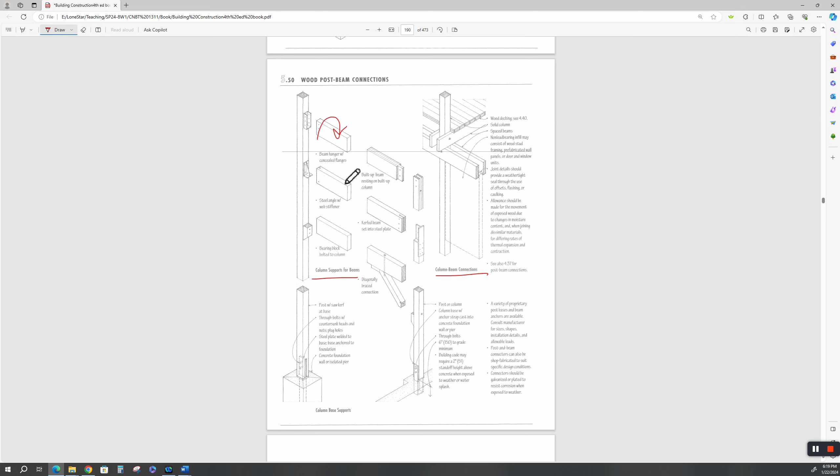There are easier to construct details. Here's another, this is an easy one. This is a pocket, made by the same company that makes these. Strong Tie makes a form of this.

This is embedded in the concrete, and then the column sets on there. And it's good to put a shim underneath this because you don't want this bearing on the concrete and water to stay underneath here, because it will end up, even if treated, rotting down the end grain.

Because this is cross grain and this is in line with the grain. So this is the end grain down here, and you don't want it to rot up through there. This is easy because now you can use it as your template for drilling and then lag bolting through there.

But it's exposed, and this is an attempt at hiding the joint, and there's no reason to hide it. I doubt you'll ever get these lined up perfect.

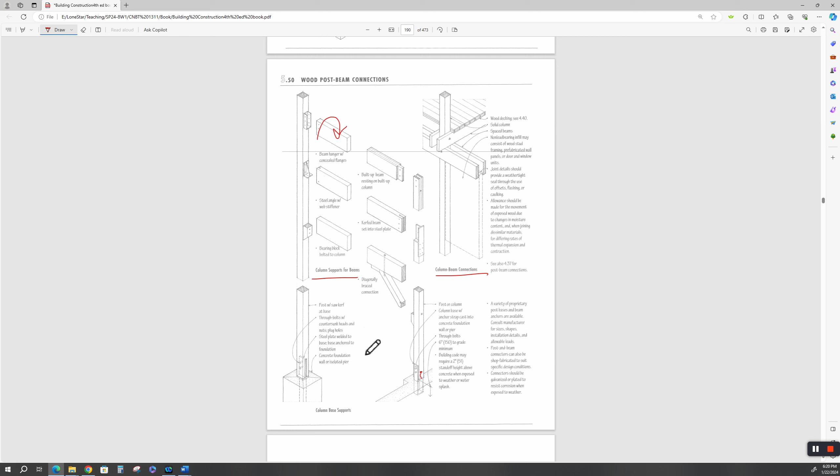This kind of deal, this kerfing is bad. Plus, you're reducing the strength of your column by cutting all that, hogging all that wood out down there. But that's my opinion as an old structural engineer and a contracting person.

You'll set four of these columns long before you even finish starting to set that one. I guarantee it. All right, that ends it.

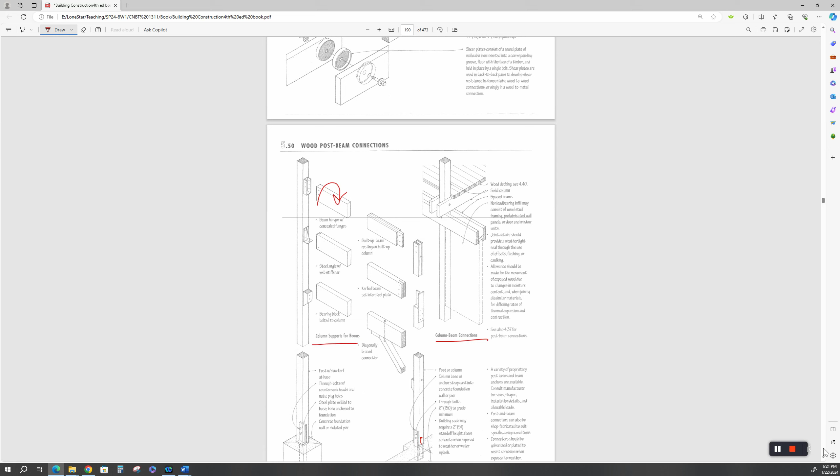Right? Oh my goodness. So how long was this video? Oh my gosh, it's an hour and 5 minutes. Well, we'll survive.